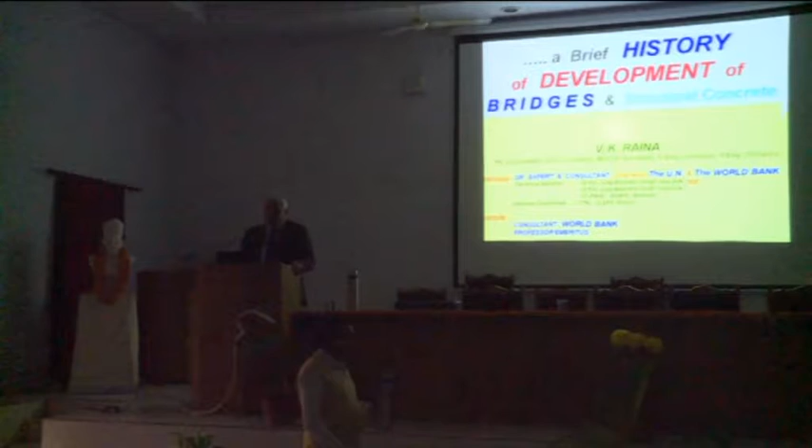I was born in November 1940, not January, and I'm no more with ILFS. That was long back, and perhaps he has been able to see my old CV. That's fine, but I'm so grateful for all the kind words. I hope I'll be able to live up to the expectations of you all.

There are two major sea links. One is a 26 kilometer long one connecting Bahrain and Saudi, which is completed, right from negotiations through investigations, analysis, design, construction, supervision, maintenance and everything. The other one is a 40 kilometer long link that connects, or is proposed to connect, Bahrain with Qatar. That is still in the stage of construction.

Anyway, that apart. Today, what I'm going to talk to you about—we had mentioned we'll be talking about the recent Nepal earthquakes and the infrastructure issues there too. That we have decided will be tomorrow morning at 10 o'clock, here. So today we will talk a little about a brief history of development of bridges and structural concrete.

I will be very quick, I was told the director has to go somewhere at 5:15 or something, so just about that time I'll quickly show the last few slides which are of extreme interest, and then you can proceed.

Bridge design and construction have come a long way during the past few centuries, and much water has flowed down, particularly in the past 100 years or so, during which more bridges have been built than in all the previous centuries.

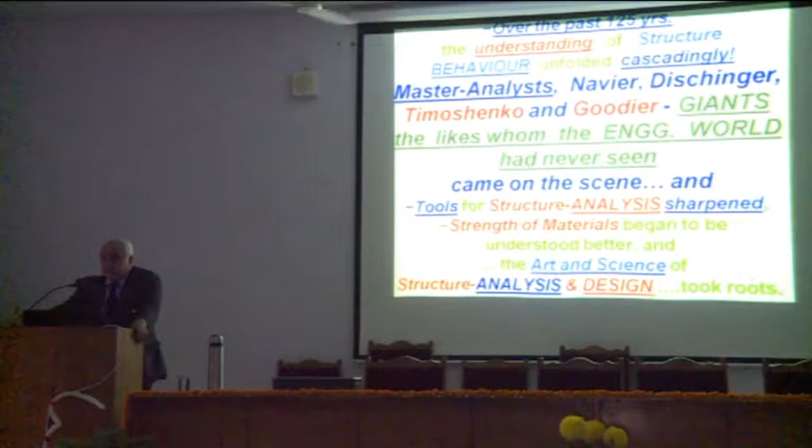Over the past 125 years or so, the understanding of structure behavior unfolded cascadingly. Master analysts like Navier, Dischinger, Timoshenko, Goodier, then subsequently Torroja, Morandi, Guillaume—these giants, the likes of whom the engineering world had never seen—came on the scene. The tools for structure analysis sharpened, strength of materials began to be understood better, and the art and science of structure analysis and design took roots.

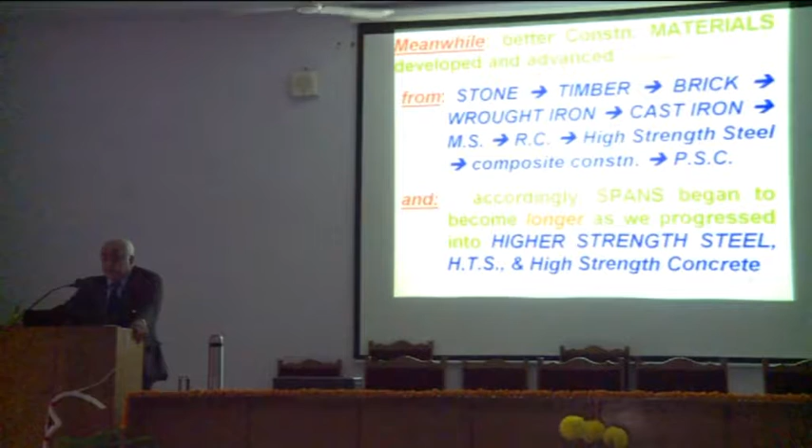Meanwhile, better construction materials developed and advanced, from stone to timber to brick to wrought iron to cast iron to mild steel to reinforced concrete to high-strength steel to composite construction and to pre-stressed concrete. Accordingly, spans began to become longer as we progressed into higher strength steel, high tensile steel, and high strength concrete.

We're talking of history, so we have to see the turning points. The flexural strength of a section was proportional to the square of its depth, but only linearly to its width—this was perhaps one of the greatest revelations ever in understanding structural efficiency.

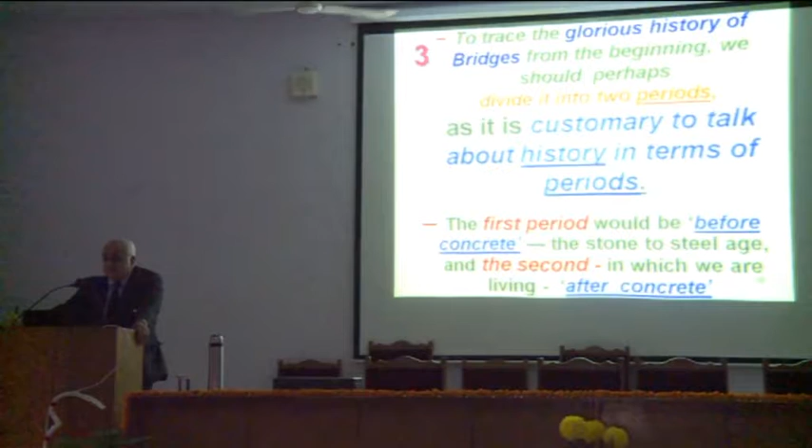Width versus depth. To trace the glorious history of bridges from the beginning, we should perhaps divide it into two periods, as it is customary to talk about history in terms of periods. The first period would be before concrete, the stone to steel age, and the second, the one in which we are living, is the one after concrete was born.

Stone and timber were the traditional building materials since the start of civilization. Stone arches, used mostly in early bridges, date back to the days of Babylon. Romans learned the art of building arches from the Etruscans. These arches were semicircular.

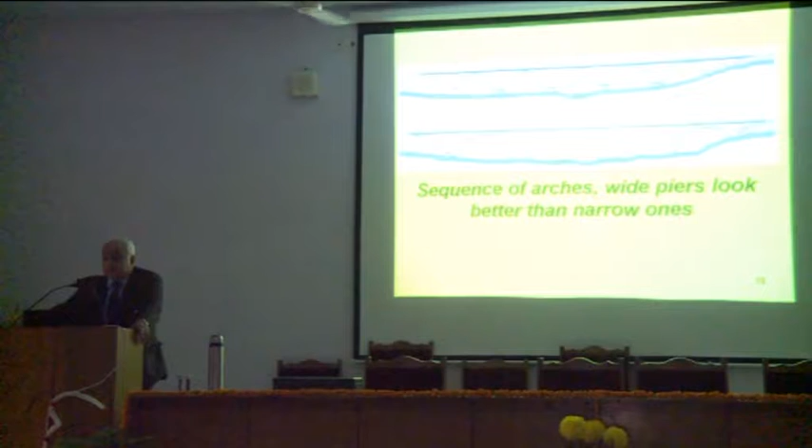It has changed very little since, because of the line of thrust. This is a sequence of arches as they were then, and even now we copy them. Sequence of arches, wide piers do look definitely better than the narrow ones. This is a sequence of flat two-hinged arches.

Back in 1502, this is important, the great man, the Sultan Bayezid of Turkey, he was a visionary. He wanted to cross the 240-meter gap between Istanbul and Pera across the waters, and he wanted a single-span structure.

He could think of nobody better than Leonardo da Vinci, the great master. His services were requisitioned. He came, he saw, he investigated, he drew his sketches, took his money and went back home. It was agreed that this would be built.

But this visionary Sultan gave up the idea because he didn't find the technology of the day able to construct something of 240-meter single span with the construction methods and materials available then. So the whole project was given up. The sketches got lost. This is 1500 something.

It's only about 452 years later, in 1950 something, that an art critic by the name of Sands attended the exhibition of Leonardo da Vinci's sketches and drawings.

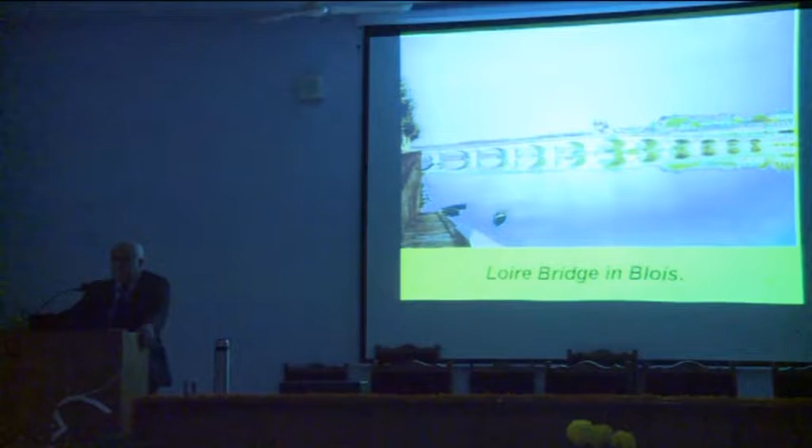Then you have this famous Loire Bridge in Blois, France again. Very simple, but see the beauty of it without interfering with the background.

Then we have this famous Professor Maillart bridge across the Salgina Gorge in Switzerland, 1930, reinforced concrete, hinged arch, three-hinged arch.

This is something we have to see, and you just fall on your knees when you look at it. It is absolutely music frozen in space. It fits so very nicely into the background, and you can imagine when it is all snows how beautiful it must look.

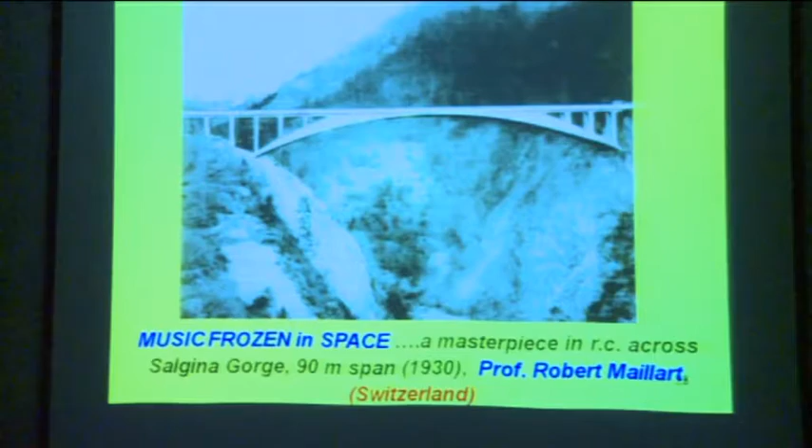Compare that with the monstrosities we have in Delhi. You will close your eyes when you come to Delhi and see them. There was once a study conducted by the World Bank on the effect on the human psyche of the hundreds of flyovers, concrete monsters being built in urban areas. The result was that looking at things like what you see in Delhi will almost certainly reduce the lifespan of those who look at it every day, compared to structures like these which will increase your lifespan. It's as simple as that.

Right now I am working on a project on climate change effects on bridges. We designed the Saudi-Bahrain causeway for a 30 centimeter rise in sea level. We did everything, it's built, but it is wrong—today the estimate is upwards of 1 meter. But this is all conjecture, nobody can really analyze that. Be that as it may.

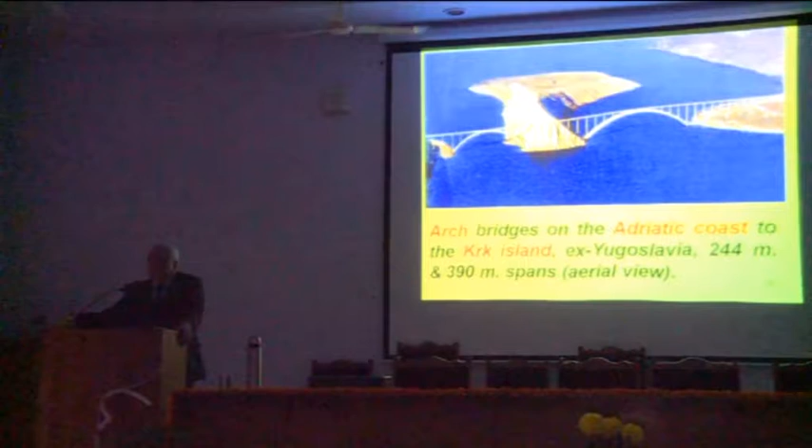This was a competition, in the island of Krk in what was ex-Yugoslavia, which has since broken into three countries. I was there for almost a year.

This was a competition. They wanted to build these connections between one side and the other. I don't know if it works. Yes. Oh, I don't, yeah. Yes. So, I can't work with this.

Connecting this side to that side—this was a global competition. The idea was not to hurt the environment, but to make it fit beautifully into the background. This competition photograph, taken by air, shows how beautifully it fits in, merging with the background of the rocks.

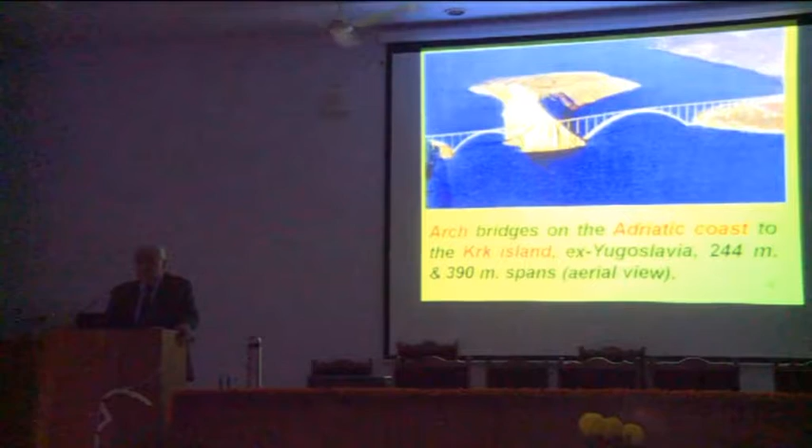It's not just about calculations and analysis—you have to do a lot on environment and aesthetics, because these are things that will be left for centuries. Well, one hopes for at least a century, if not longer.

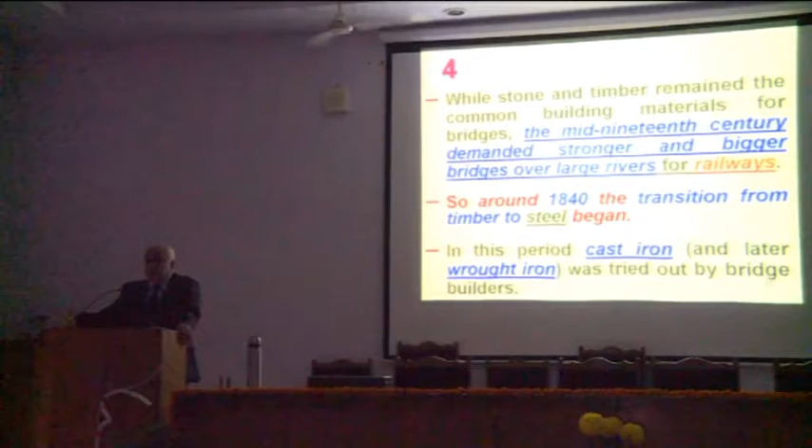While stone and timber remained the common building materials for bridges, the mid-19th century demanded stronger and bigger bridges over large rivers for railways. So around 1840, the transition from timber to steel began. In this period, cast iron and later wrought iron were tried out by bridge builders. Cast iron, being reasonably good in compression but no good in tension, could not allow longer spans. Later, when wrought iron came into existence, the two were combined so that wrought iron could provide tensile members, allowing longer spans. This was another big step in the history of bridge development.

The first recorded use of iron in bridges was a chain bridge built in 1734 by the Saxon army across the Oder River in Prussia. However, cast iron was not suitable for large span bridges due to its low tensile strength. A combination of cast iron for compression members and wrought iron for tension members was used for truss bridges in 1840.

In 1856, just about one year before the War of Independence in this country, Bessemer patented a process for making large quantities of steel.

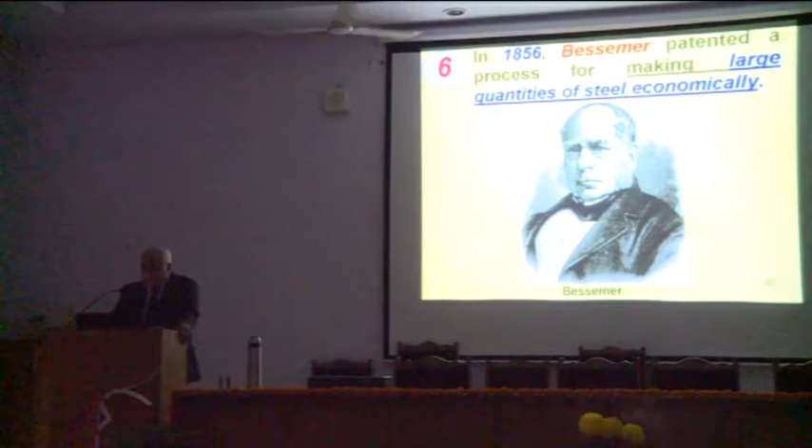This gave the fillip to the construction of bridges for long spans, followed by Siemens and Martin, who introduced the open hearth process. In the last part of the 19th century, the new material, steel, caught the imagination of bridge builders.

The Firth of Forth—'Firth' meaning a finger of sea going inland in Scottish, and Forth being the name of the place—was where a bridge was built: a cantilever bridge of 520 meter span. Then there was the Brooklyn Bridge, Roebling's suspension bridge of 490 meters in New York. These were a few of the famous achievements in the 19th century marking the beginning of the modern era of bridges in steel.

This is the Firth of Forth Bridge. When you see it broadside on, it speaks to you. You can see the flow of stresses. You can see it is simply telling you how it is built. It's a cantilever construction, simply supported, believe it or not.

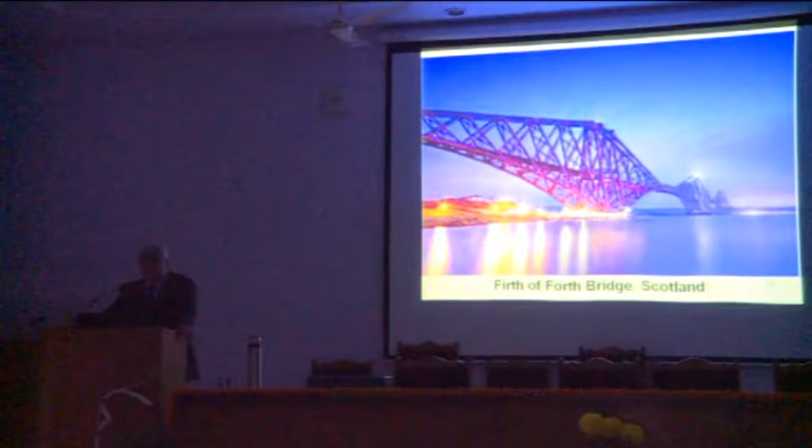I would like to spend a little more time, but I don't have time. The director has to leave.

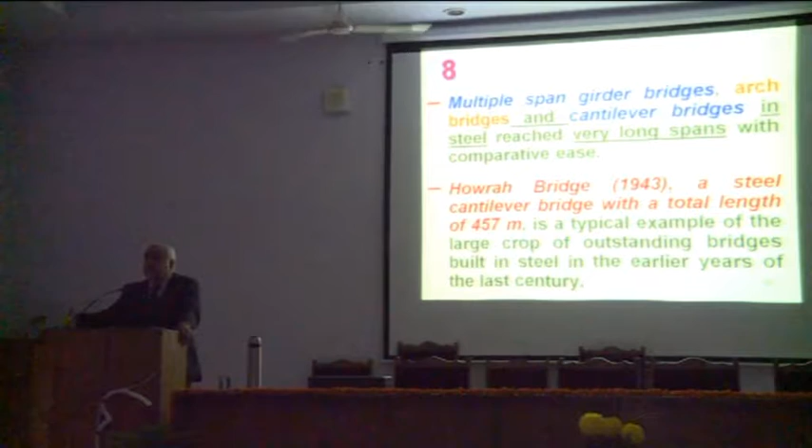Howrah Bridge, our own, 1943, designed by Rendel Palmer and Tritton of England, a steel cantilever bridge with a total length of 457 meters, is a typical example of the large crop of outstanding bridges built in steel in the earlier years of the last century, but it is a bewildering mass. It is optimal quantity-wise; some people like its shape, some don't. It is an absolute bewildering mass because it carries rail traffic, road traffic, millions of people. You have to see it to believe it. Many of you must have seen it.

A very substantial advance in the understanding of the theoretical analysis of the load response of the structural system of suspension bridges was made by the 1920s. Many elegant bridges were built, like Lindenthal's Manhattan Bridge of 1909 with a 450-meter span, followed by Steinman's 340-meter span Florianopolis Bridge in South America, and the Delaware River Bridge of 530-meter span in 1926, to name only a few.

By the way, Steinman's bridge of 340 meters - he was given the commission to do the analysis, design, detailing, and then supervise the construction. But as a student at New York, this was the very bridge that was his project, which he submitted and got his degree for. Then later, in practice, he was given the same bridge to actually build, which he did, and I will show you that.

The big leap forward came in 1931 with the construction of the George Washington Bridge in New York City, which has been acclaimed by no less than the great Stüssi, one of the very great engineers. He said of this bridge - and this is translated from French - it was the most important step in the evolution of art and culture of bridge engineering. This is an exact translation, therefore it suffers a little bit, but I didn't want to touch it.

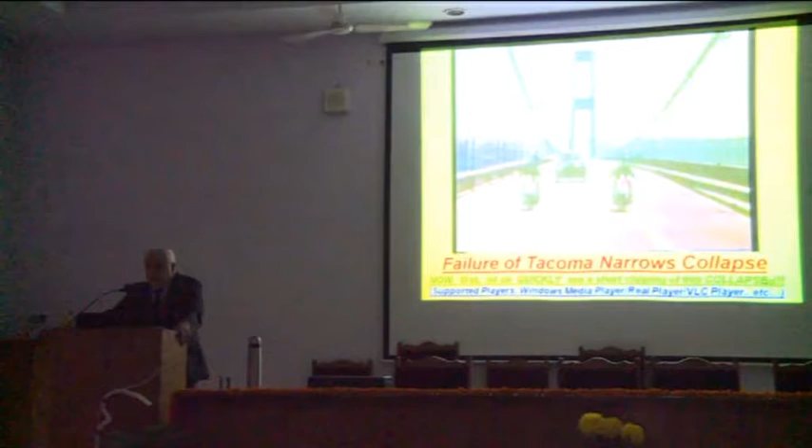You might have seen it, but I'd like to show you, if I can, at the end, the video clip of the actual failure of the entire long bridge. This is only a part of that—the end part of it. I'll copy it and show you later. This is the one which I will show you.

Professor Fritz Leonhardt, the great man, worked under Hitler and built a lot of bridges for him, but he claimed all along that he had nothing to do with the Third Reich. He was a great analyst, a greater designer, the greatest detailer—the one who proved that detailing in the drawing is much more important than all the analysis in the world.

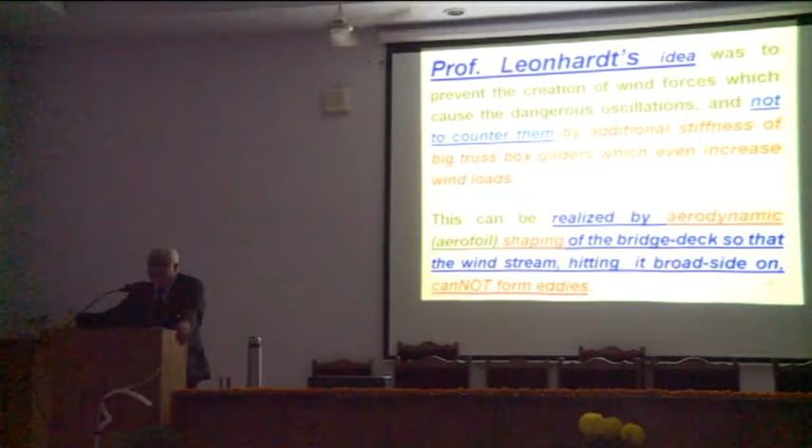His idea was to prevent the creation of wind forces that cause dangerous oscillations, rather than counter them with additional stiffness from big stiffening trusses, which actually increase wind loads at their nodal points. This can be achieved through aerodynamic, aerofoil shaping of the bridge deck cross-section, so that wind hitting it broadside cannot form eddies. This is the great man—he has since died.

Simultaneously, the reaction forces caused by the wind, the static wind loads, can be reduced considerably. The dangerous torsional elements of oscillation can further be prevented by suspending the deck from a single cable—monocable suspension bridges. That was his idea.

In fact, a consortium of European contractors took the design approach of Leonhardt and Krupp and used it for the bridge across the River Tagus in Lisbon, Portugal. I'll show you—I keep jumping across.

The first design of this completely new type of suspension bridge deck—monocable with inclined suspenders, so the truss reactions would also help stabilize it—was made in 1960 for the Tagus Bridge in Lisbon, and tendered for by a consortium of European construction firms.

But the 1,104-meter suspension span bridge was, however, built the usual way using stiffening trusses. The reason was that the government officers all had the same old mindset. As I said this morning, don't ever join government service if you want to be an engineer. Don't ever.

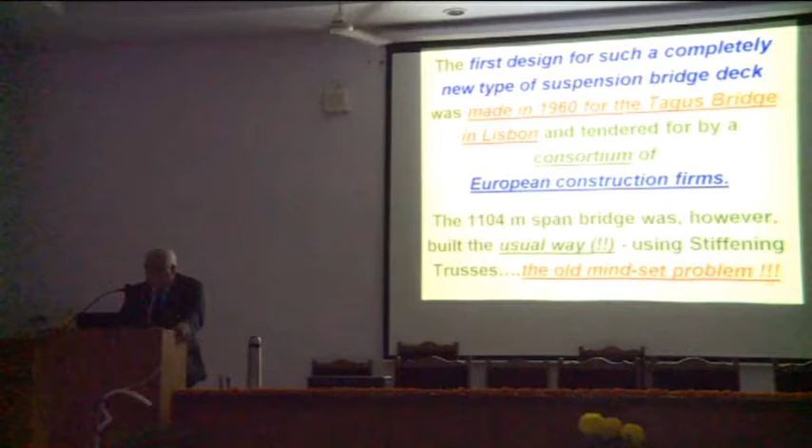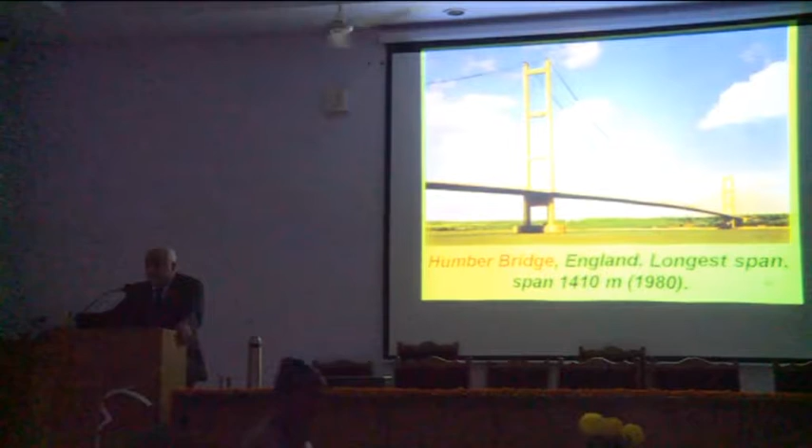Humber, England, 1410. No stiffening trusses, but you can see the cables. If you can see - can you see them? Not very much, not in this slide. This was again a step in bridge building.

As I said, we're talking of history. We're not talking today either of analysis or of design or of detailing or of drawings or of quantities or of costs or of contracts. We're talking of the history, which is this.

Introspection, and this is important. One wouldn't learn unless one investigated and admitted the failures.

There's something which you might know - a feeling, a random empirical feeling that every three decades, every 30 years, there's a major bridge disaster in the world. There were three of them, four of them, that occurred within a span of 5-6 years: the famous King's Bridge collapse, then the Koblenz Bridge in Germany, then Yarra Bridge in Australia, then Milford Haven in Wales.

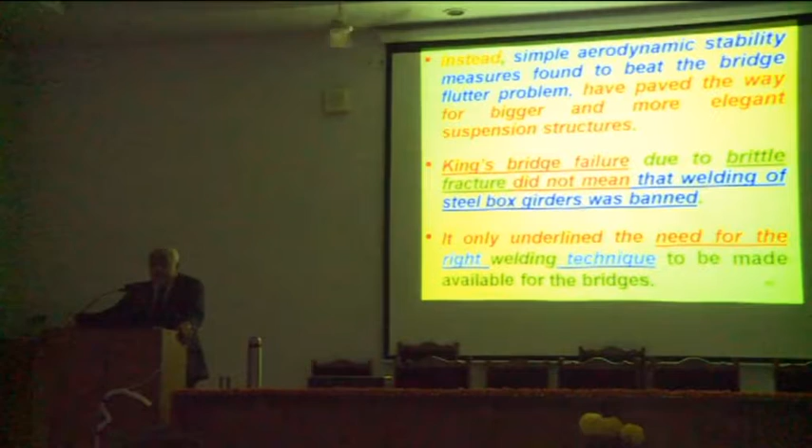In very cold atmosphere, steel can crack off because of brittleness. King's Bridge failure due to brittle fracture did not mean that the welding of steel box girders was banned. It only underlined the need for the right welding techniques to be made available for bridges of this sort.

And likewise, the series of box girder failures of the 1970s could not lead to the conclusion that there was anything fundamentally wrong with thin plate structures. You see, concrete bridge decks, which are boxes, do not suffer so much from warping and distortion, but the steel boxes do, because they are thin-walled structures.

To understand distortion and warping, you have to understand, you have to analyze, you have to use the second-order theory, you have to go back to the basics, you have to go back to the differential equations. If you don't do that, you don't learn from it.

The second order, i.e. the buckling analysis of instability of thin plates due to geometric imperfections, only earned the design attention that was previously lacking. So it became part of the design code. Few, if any, of the failures became inevitable merely through the inexactitude of available methods of computing stresses.

You can compute stresses, you cannot measure stresses. It would be an illusion to suppose that greater perfection in such methods and a bigger pile of computer printouts, which I'm afraid today's designers do, of itself will reduce the risk of accident. Just because you have a big pile of computer printout doesn't mean a thing.

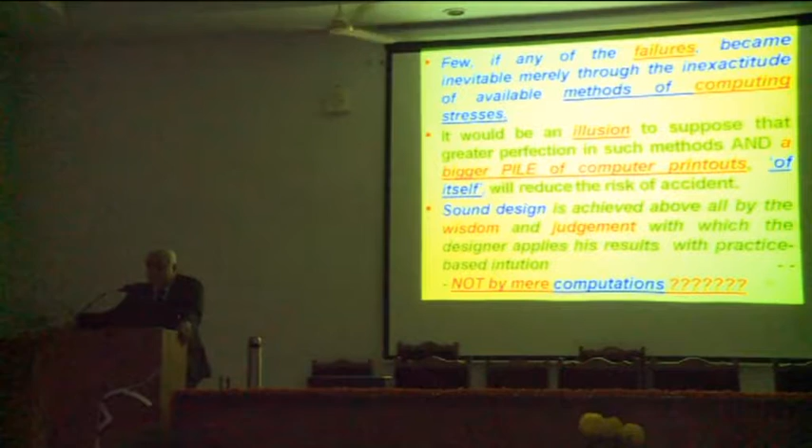Sound design is achieved above all by the wisdom and judgment with which the designer applies his results, with practice-based intuition, not by mere computation. Great courage and judgment are demanded of the inquirer, as he has a task which requires freedom from bias, while at the same time demanding a definite opinion. Originality comes out of understanding, and understanding comes out of relentless practice, not from mere talking. Good judgment comes out of experience, and experience often comes out of bad judgment.

The great Navier, in 1820, opted for the classical suspension system, and he condemned the cable stayed solution, which is today's rage. But that was the level of understanding of the great mind then. He was a great, great analyst. It remained that way until 118 years later, in 1938, the master analyst Dischinger developed a suspension system which was actually a combination of cable stayed and classical suspension bridge systems. Then started the beginning of cable stayed structures, because somebody like Dischinger came forward and showed us how.

Now you can have, basically, if I can touch it again, I'm afraid of your pointer. Initially, no, it won't work, is it? These pointers are all disappointing. Can it? No. Anyway, you can see initially, I want time, I can't do this in 50 minutes, 1 hour, 2 hours, 4 hours minimum, because then you will get the taste, the flavor of what I have to talk to you. It's a lifetime thing that I'm talking to you.

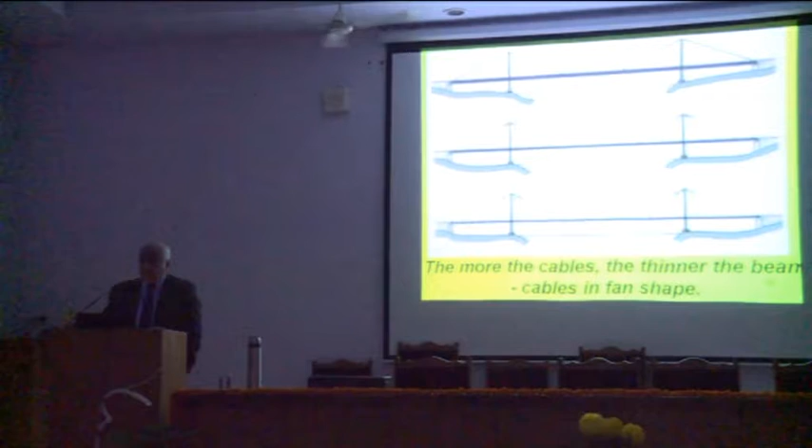It is thought that cable stayed bridges began to be built only recently, just 25 years ago, which is nonsense. The first one was done by Riccardo Morandi. I worked under him for 2 years. Difficult to get money from, but if you sat in his presence, he would radiate understanding into your thick head. He was so great, Italian.

He is the first one, in the 1950s, he built the one at top. I'll show you his actual bridge, but he was essentially a single cable and thick beam system. Later, people understood they had multi-cables, and obviously the pickup points are so many more, the thickness of the beam system becomes lesser. Then came the multiple. Some is fan-shaped cable system, some will be, I'll show you those. This is how the development took place, but he was the first one.

In fact, some people dispute that, because Denmark or Sweden also built a similar bridge around that time.

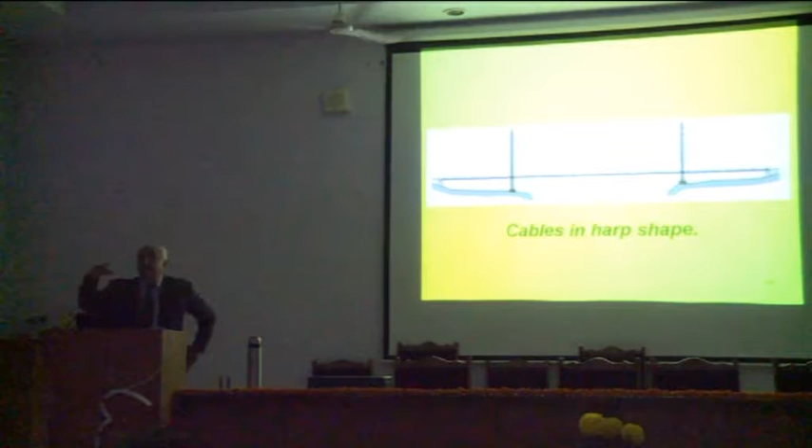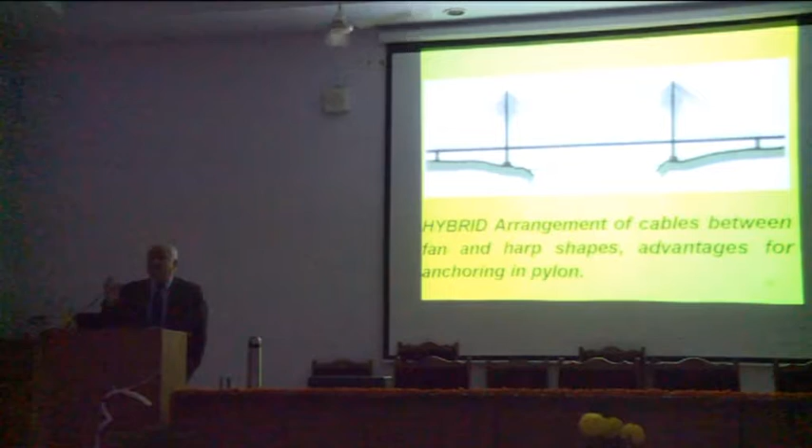This is a cable in harp shape. Some people like it, some don't, but it's much easier to change, if you have to replace some of the stays, this is the easier one, not the one which is fan type, because they are so congested at the very top. This is the fan type. Now this is the hybrid, which is part cable, part fan and part harp, both. So you can replace the stays as well as still try to retain a little more beauty of the fan system.

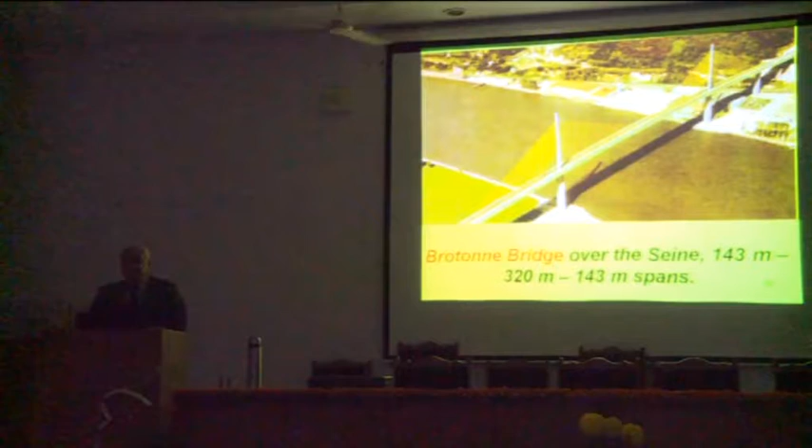One of the best ones is a very complicated bridge, this one, Brotonne, over the Seine, near Paris. 143 meters, 320 meters, I mean the central span is over 1,000 feet. But it looks a beauty. You look at it, you just fall on your knees in silent salutation to somebody's understanding. That is this bridge.

The great Professor Leonhardt hypothesized way back, he's no more, he's dead, in his 1972 IABSE paper that for spans of 750 meters to 1500 meters, the cable-stayed system was technically and economically superior to the classical suspension system. And if Fritz Leonhardt makes that statement, you just don't question.

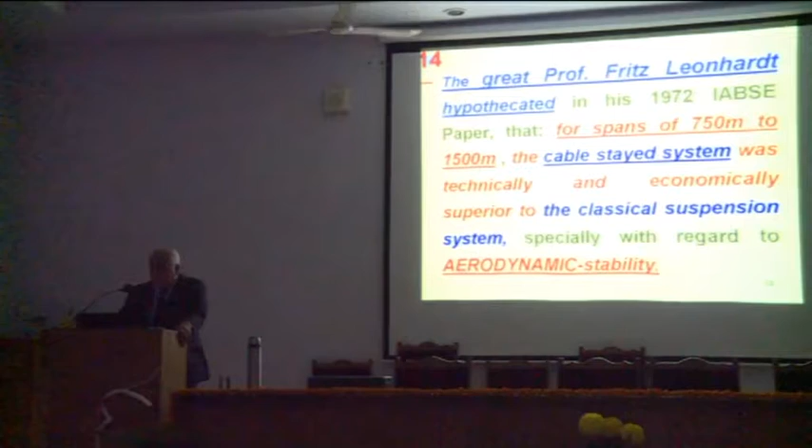Especially with regard to aerodynamic stability, but not for railway bridges because of the impact, because of the vibration. This is that Professor Leonhardt.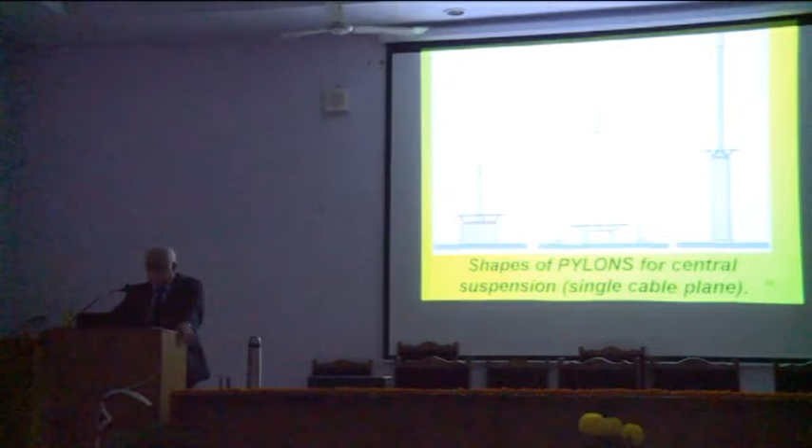High cable stresses to ensure favorable stiffness ratios on flat aerodynamically shaped aerofoil deck sections with sharp wind noses are now the order of the day.

The great Stüssi again remarked in his IABSE Symposium on Concepts of Safety of Structures, London 1969, that the scientific period of design was introduced by Louis Navier way back in 1785-1836. The same old man, Navier, great man, who provided the transition to scientifically based construction with his principal work titled Résumé des Leçons, 1826, and thereby fundamentally created the applied science of statics.

This is too good. I wish more people had come. You won't read this in the books. I'm really not very happy. I wanted to see many more people.

And I shouldn't be saying it because this is a place where I belong. Elsewhere, I charge one lakh for a two-hour lecture, believe it or not. That might put some sense into those who haven't come.

The great Navier gave these lessons. He was a great teacher too. The great Navier gave these lessons on the application of mechanics in the establishment of construction and machines. This is an exact English translation of his French.

So I don't want to touch that, I just translated it as is. The great Navier gave these lessons on the application of mechanics in the establishment of construction and of machines. He gave this at the Royal School of Bridges and Roads, l'École Royale, whatever.

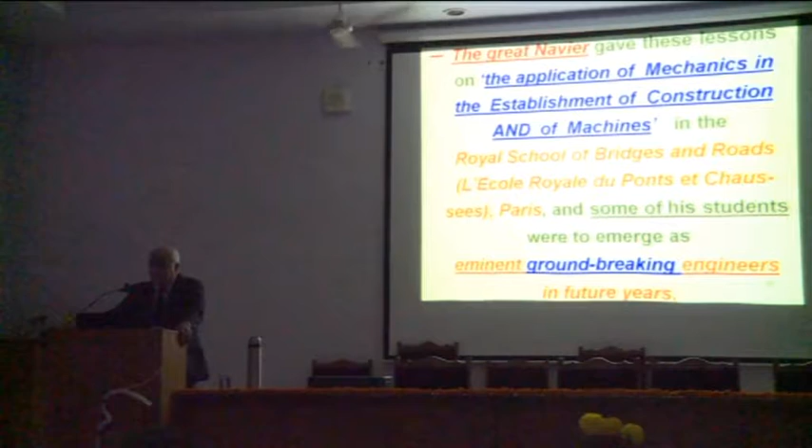Some of his students were to emerge as eminent groundbreaking engineers in future years. After Navier, the development of engineering design was fostered by very many pioneers like those groundbreaking great men, Karl Culmann, Otto Mohr, Friedrich Engesser, to name just a few.

And the glorious history of Roman concrete. We graduated from steel, we're now coming towards concrete. This was used to build such famous structures as the Pantheon, which is more well known.

Animal blood was used for some time in their earlier days for mixing concrete. Some details of history of civil engineering are bizarre, if not gruesome. But the art almost went into oblivion until the grand revival in recent times marked by the entry of Portland cement into the scene.

With the progress of Portland cement concrete, it came to be used in bridges as a substitute for stone initially. Concrete was first used for a bridge of 13.5 meter span across a canal in France in 1840.

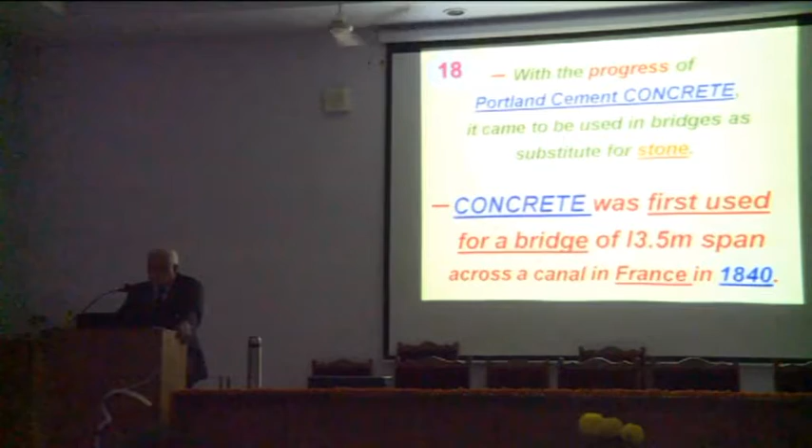You're welcome, but—ladies, I am addressing you—you're welcome, but I don't like coming late. If you can't, then don't come. This is not a picnic.

Coignet, another great man, another Frenchman, took out a patent at about the same time on the structural use of reinforced concrete. Now you will see how many people were interacting for the development of structural concrete.

In 1855, Wilkinson, a Britisher, secured in England a patent for a concrete arch floor reinforced with tie bars. This is his exact words, which was discussed by no less than Fairbairn in his celebrated book in 1864.

Then came Monier. Monier's first patent was taken three years later. It's all in the race for structural concrete. That's why I said a brief history of development of bridges and structural concrete. Now just see—Wilkinson, then Fairbairn, then Monier, and first Coignet.

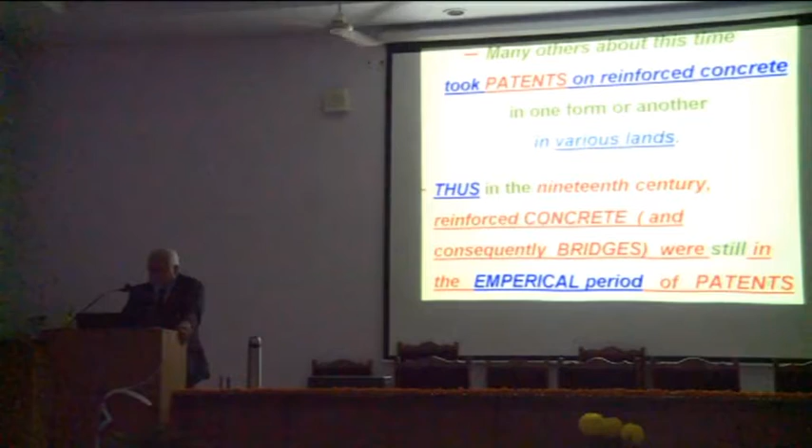The search for a basis of rational concrete structure design, not structural design, try and understand that, began in the last part of the 19th century itself.

Thaddeus Hyatt is credited to be the first to establish a basis of analysis of stress in reinforced concrete. He made absolutely visionary statements that you take for granted today. He stated the principle of bond, that the reinforcement must be able to resist sufficient tensile stresses to balance the compressive stresses in concrete, which you don't even think about now. But this was one of the fundamental, groundbreaking statements of a visionary then. And then see what happened after that.

Hyatt was an American lawyer, not an engineer. By education he was a lawyer, but an inventor by nature, and was later to take patents on deformed bars, what we call tor steel in this country, which is FE 500 now. He published his 28-page book on the use of Portland cement concrete combined with iron in 1877, which may have antedated the design principles to emerge by a good two decades.

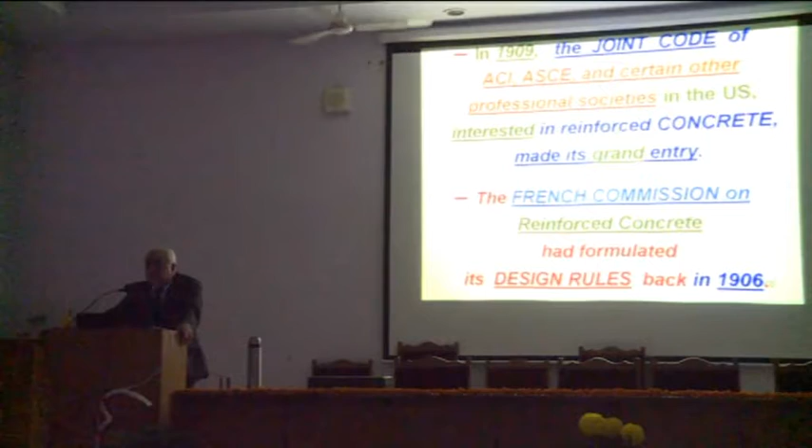In 1909, the Joint Code of the American Concrete Institute, American Society of Civil Engineers, and certain other professional bodies in the U.S. interested in reinforced concrete made its grand entry. The French Commission on Reinforced Concrete had formulated its design rules way back in 1906.

That use only the smallest quantity of mixing water that will produce a plastic, workable concrete. No effect, no problems now, no sweat, but it was not known then. That's a big step in the history of development of structural concrete.

And yet another historic pronouncement back then: with careful control of water and proportioning, attention was focused on workability, placement and compaction.

Then came the wonderful Monsieur Freyssinet, the Frenchman. We'll talk about him in a few minutes. He proposed compacting concrete by vibration, way back in 1917, yet another historic development. You know these vibrators used for compacting concrete - think about how many vibration impulses per second. And that he said in 1917.

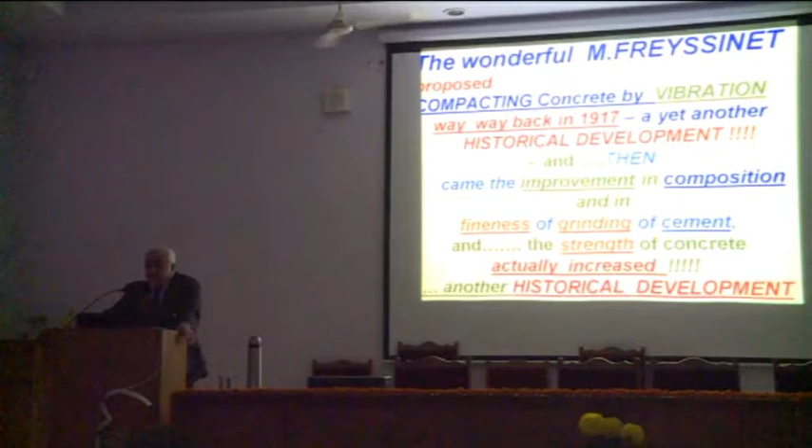Then came the improvement of composition and fineness of grinding of cement. Finer the cement, the better the grinding. The smaller the particle size, the higher the heat of hydration, the better the strength. But controls had to be tight. This actually increased the strength, and this was a historic development in the business of structural concrete for high-strength structures.

In Europe, they used mild steel like we used; Americans preferred deformed, tor steel. The designers had chained themselves universally to a low permissible stress of 1250 kilograms per centimeter square, and the bogey of cracking and corrosion made higher strength reinforcement almost a taboo. They wouldn't let you.

And you can see, I can't use it. This is a bogus thing. It doesn't work. I knew this wouldn't.

Then we had the other example, this is in Manchester, Mancunian Way flyover. Not precast, cast in situ, but here it is. Here it is. Then this is Al-Khaleej Viaduct in Riyadh, Saudi Arabia.

You have to see the bridges in Saudi, you will understand how good those bridges are. Not by Saudis, these have been done by outsiders. But this is 2 kilometers long, snaking like this, called Caterpillar Bridge. Now, there was no need for cantilever construction, the method by which this was built.

You can see why the soffit of the bridge, soffit of the superstructure, is only 5.5 meters above the ground. Nobody, you have to be foolish to do this. But one of the sheikhs had gone to Europe, he saw a construction that looked like that, and he insisted, he said, I want a construction like this.

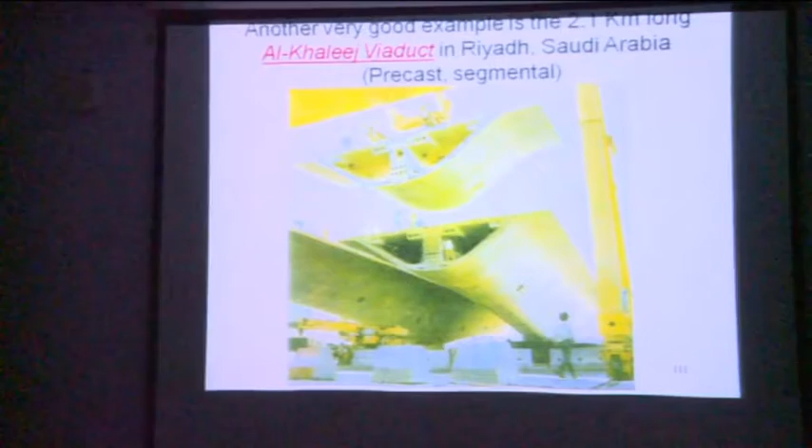We said, yes, why not? It was a laboratory exercise, we were paid very heavily, we did something we would never do, and that was this. And this bridge, how it looks at night, there is no pier. The superstructure literally sits directly on the bearings and the footings, because there was no need for it. There is no height, but we had to do it.

But the beauty and the difficult thing about this is the cross-section of the superstructure, it's two parallel boxes going snaking around, is a hyperbolic paraboloid, longitudinally as well as transversely. No 5 square meters of shuttering could repeat from one place to the other. You can imagine how costly this stupid exercise was. But he wanted it, so he got it. We got our money, he got his bridge.

Flyovers have also been built totally using precast elements. A very quick one. Here's an abutment which is built out of precast elements. They are numbered 1, 2, 3, 4, 5, 6, 7. They're all organized here. If we had more time, because he has to go.

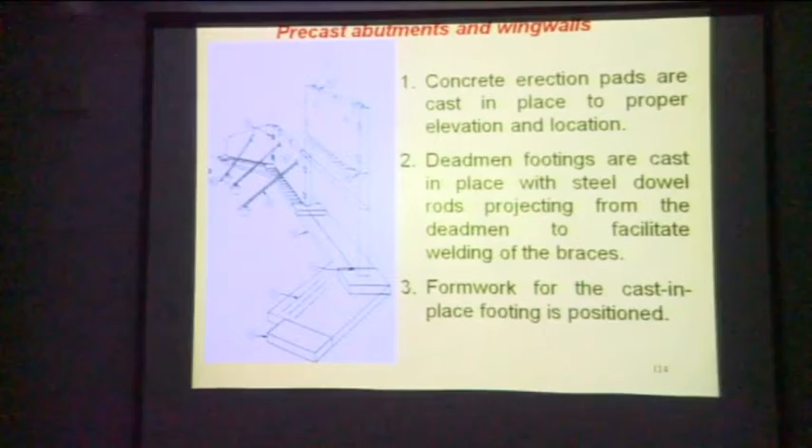These are the steps, and each individual precast piece, how it is built up like a Meccano set. Precast abutments and wing walls.

Then you can do a bridge like this, everything is precast, you can see that. The pre-stressed concrete sheet pile, abutments and wing walls, pre-stressed concrete piling pier, reinforced concrete abutments and wing walls, everything is that, precast, fully, you can see you can feel it, see it straight away.

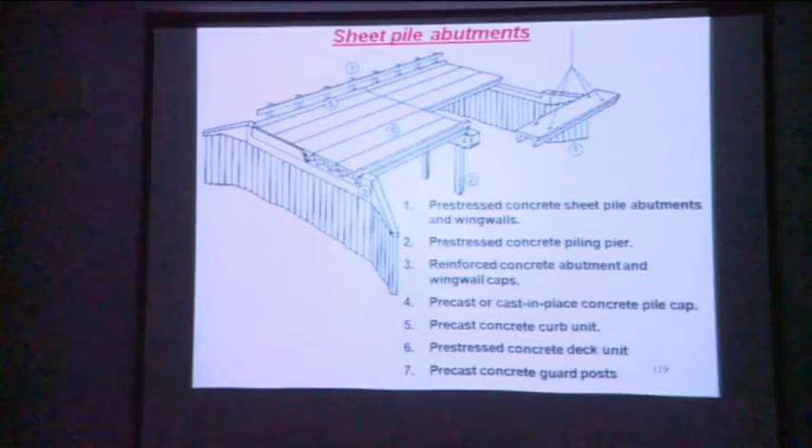The big break in the art of reinforcing the concrete came with the introduction of pre-stressing. The idea of pre-stressing, conceived and put to practice in the 20th century, is the single biggest happening of the greatest significance in the entire history of construction on this planet.

The man who first gave the form and content of this concept, the originator of the pre-stressed concrete idea, was none other than the greatest of greats, the master designer, builder, genius of all time, Monsieur Eugène Freyssinet, a Frenchman, the greatest civil engineering visionary of all time. Here is the man.

A lesser man would have been contented with the fame and fortune he had in the 1930s, because he was an inventor par excellence. He had money from all the patents in the world. But Freyssinet was a man with a mission in his heart. His life carries an obvious message. His bitter struggles for 7 long years for the cause of pre-stressed concrete made history. If history has to have its heroes, here was one for the history of bridges.

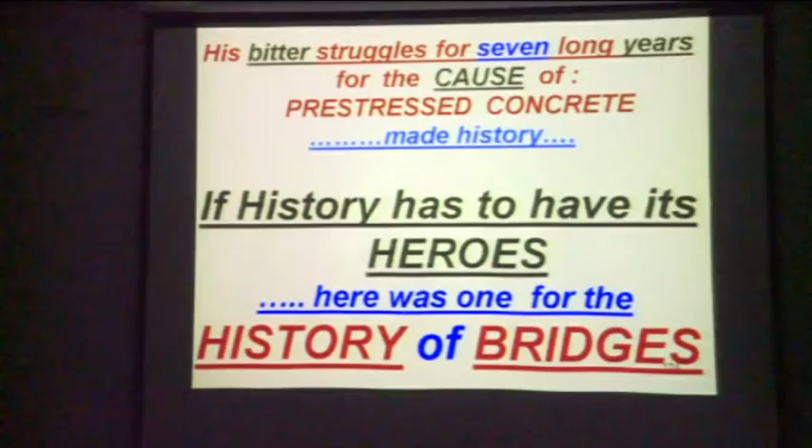Freyssinet took patents in 1928. He was out to sell history's most exciting building material, called pre-stressed concrete, but alas, with no buyers around. The same problem of mindset. He had reportedly told his friend, Le Corbusier, both being French, he says, in translation, 'I reached my goal, now I am looking around to see what I can use this discovery for, and who will accept it. How do I convince them?'

These are his desperate words. And he continues, he says, 'In my opinion, modern society needs it for all their housing and their highways.' Way back then, in the 1930s.

Corbusier was so touched by the sentiments of his friend as to conclude, in that one short sentence that Freyssinet wrote to him, he says, 'He has crammed a vast wealth of poetry, lyricism, solidarity and concern for mankind and for the hearts of human beings.'

Can we stop this fellow? It's a little... which switch is this? I don't want to touch them all. I don't know which one, I'm sorry. I would have done it, but I don't want to switch off the computer. Oh good, you have one.

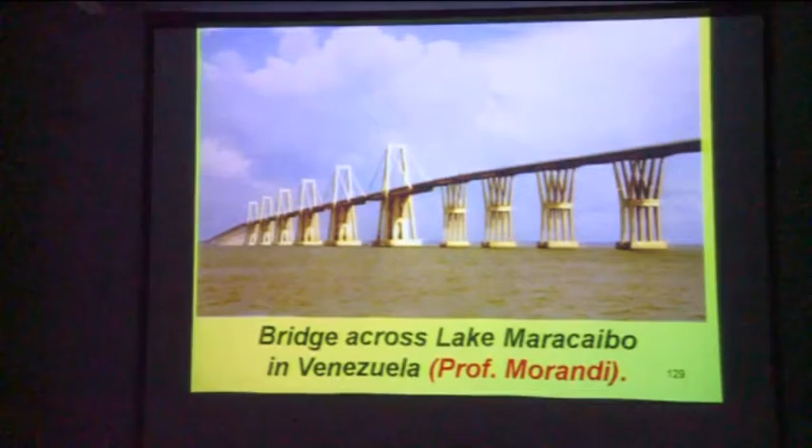This is his famous one-unit, one-element Maracaibo view of the main span. You could see how the stresses would flow. The live load would be picked up by the beams, picked up by the stays, onto the pylon, down into the foundation. Not simply supported, but statically determined. This is his famous Morandi table.

Same bridge, but very difficult for maintenance people. They have to look for cracks and distresses at a million angles and cross sections.

But that was not all - he did all the bridges across, in the west of Italy along the coast. That's called the Autostrada del Sole, the Sun Highway. There are first-class bridges in that. Each bridge is different than the other, and each bridge is more complicated than the other. Because it is coming from Morandi, nobody could question him. But these are bridges you can study for a lifetime.

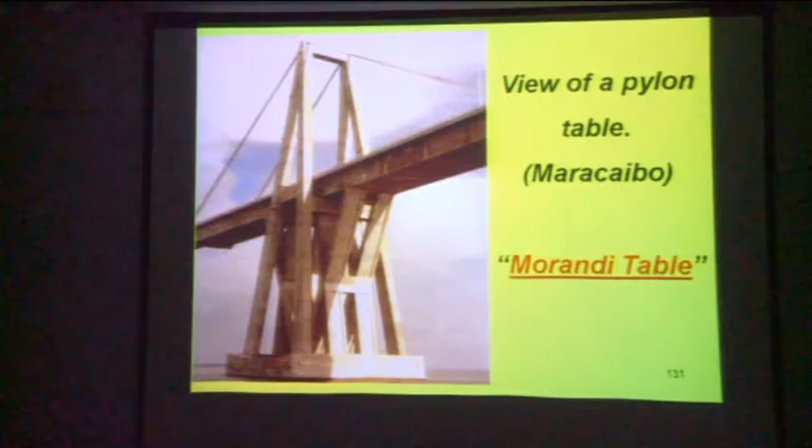You should go abroad. This morning we had a 1.5 hour session. I don't know how many of you came, but that's where I was explaining quite a few things.

Remember this: it's not the analysis that you start with. You give me a problem, and you straight away open your laptop and start - don't do that, that's not the way practice is done. You have to conceive the idea. You have to draw sketches to scale. Then you transfer those sketches to the drawing board, chisel them and cut them short here and there till it looks like something and you can see the stresses flow. Then you start the analysis, then comes the design. And in doing so you have to fix the cross-sectional dimensions first. That doesn't come by you starting your laptop.

You have to actually physically see the big notebooks that they have. I have seen one in Madrid, there's a big bookshop - that's where Leonardo da Vinci's sketches are, the big book containing the sketches, that book is about 1.5 meters by 2 meters, nobody can lift it. And these are original sketches. You see them, you will drop dead.

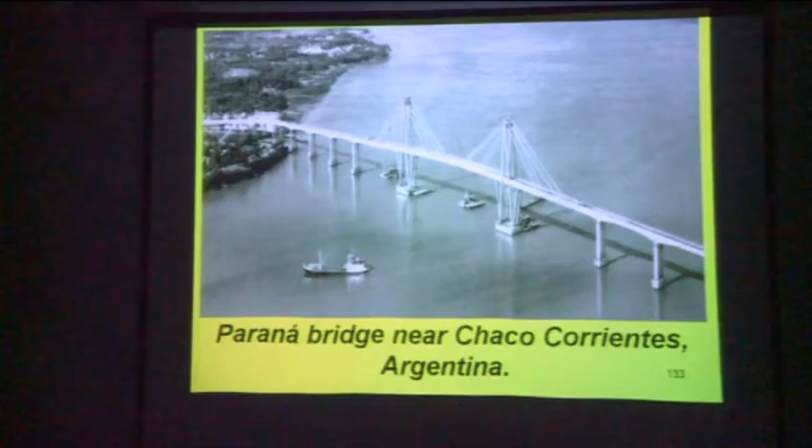In the 70s, the longest span of beams reached 230 meters in Japan, and for cable-stayed concrete bridges, designs had been made with about 300 meter spans then. Today we go up to 500 meters and even longer. But this is 1970. The achievements in building long-span bridges in pre-stressed concrete are too close to our times, like yesterday, not good old steel bridges of wrought iron and cast iron. So it's not easy to comment on bridges built in the same decades we're living in. But the development of new landmarks in span, form, and construction technology is growing at a dizzying pace.

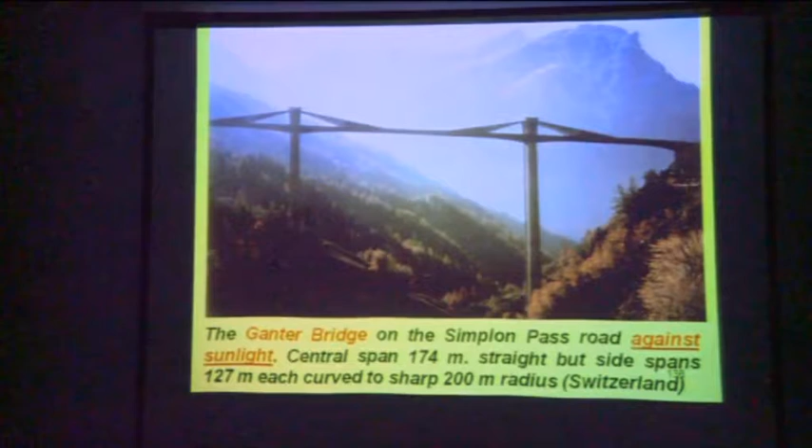Now this is again Professor Christian Menn of Switzerland. This is the Ganter Bridge, Simplon Pass in Switzerland. This picture is taken against the sun. If you see the same bridge along the sun, this is how it looks. And imagine if you see these two towers this way or that way, when it is snow all around, you freeze. You just cannot do anything other than appreciate.

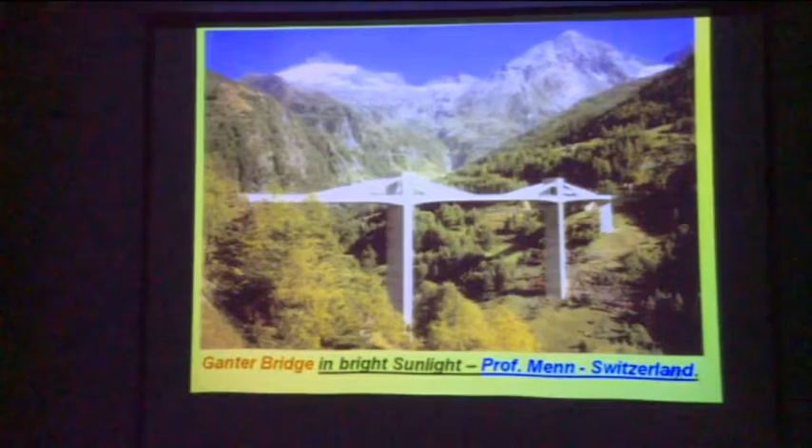Each span is over 1,000 feet, 2.5 kilometers long, and the pier height is taller than the Eiffel Tower. I'll show you that. Now you begin to see what this bridge is.

Now I'll show you a picture or two of this bridge during construction, above the cloud line.

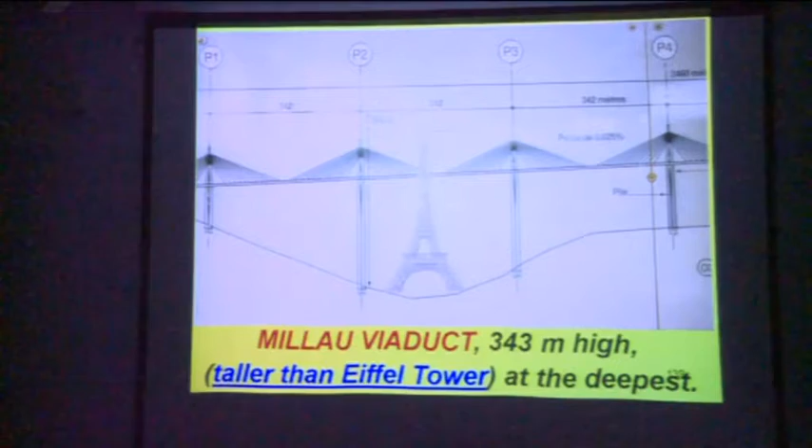Bridges is a great topic. Please take to it.

The originator of construction in the free cantilever method—because if you have to cross bodies of water where you cannot raise the staging from bottom up, you have to do something else from the top itself. That's called the free cantilever construction method. The propounder is Professor Dr. Ulrich Finsterwalder, one of the greatest bridge builders of our times.

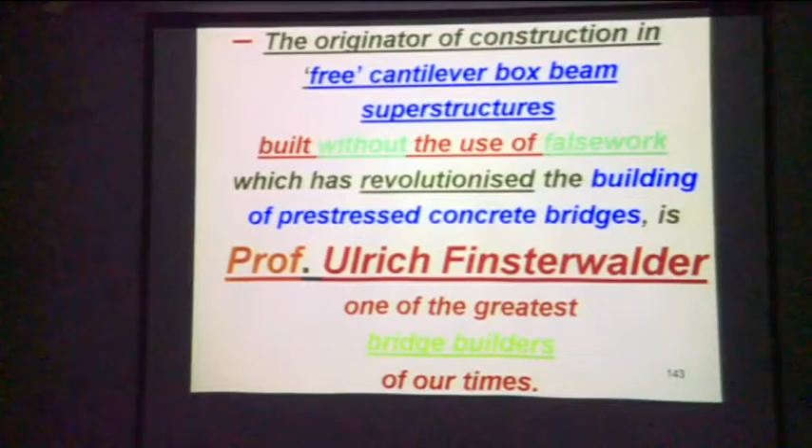Now here is the great man, with a later modification. He would do segments on both sides, pre-stress them together, again segments on both sides, pre-stress them together, and keep going outwards from the pier, doing the same from the next pier till the two cantilevers would meet. But these were all cast in situ, cast in place segments.

Somebody else came later, he did the same thing, but converted the technology into using precast segments. And that was Jean Mueller, J-E-A-N, a disciple of Freyssinet and Guyon's school of thought.

A later modification of this method, cantilever construction with precast segments, was introduced in '63 for the Choisy-le-Roi Bridge in Paris and the Oléron Bridge on the French coast—I will show you—by a contracting company. The consultant was STUP, S-T-U-P.

It's an acronym. S stands for something, T for something, U for something. STUP Paris, which was owned by Freyssinet. Freyssinet was a great legend. He would give the problem and he would give you the solution. He wouldn't tell you how. And he wouldn't perhaps even know.

But a great mathematician turned engineer turned mathematician named Yves Guyon used to be with him all the 24 hours almost. He gave mathematical proof of everything that Freyssinet propounded. And he married his daughter as well, because he was there for too long. Now, but the idea is not marrying the daughter, which you can. The idea is, these are the making of great minds.

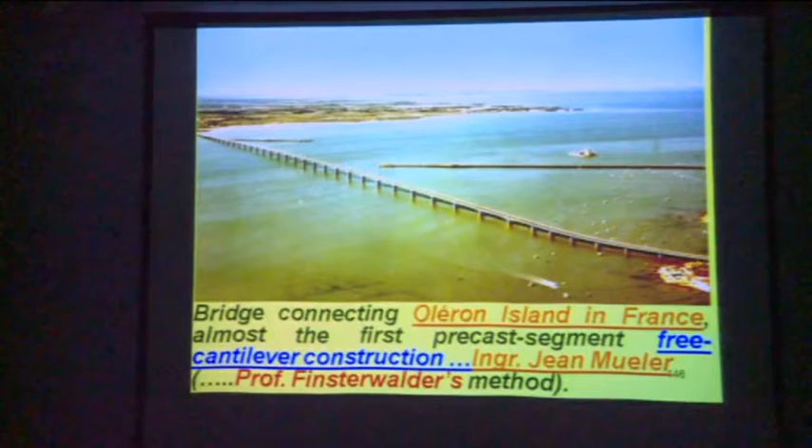Introduce those deflections in reverse, that's called the camber calculation. Even today computers have to be used in order to predict it with the correct creep coefficient. Imagine what they did in '64 when there were no such knowings. That's when you listen to them, you get to know.

No, this is the Eastern Schelde in Holland. This looks very massive, but mind you, each span is a 300-footer. It looks massive because everything is so fat and big. Everything is precast - the piles are precast, the pile cap is precast, the inverted V-piers are precast, the deck is precast. And you can see the effect of the double attack of chlorides and sulfates through the stain marks. Each span is about 300 feet, 5 kilometers long.

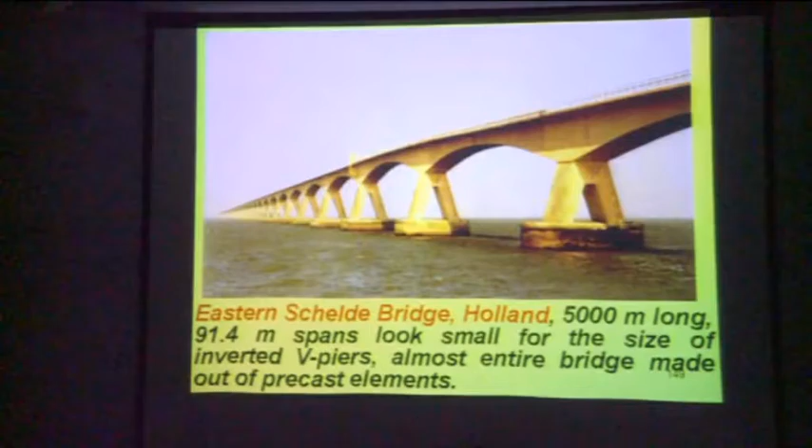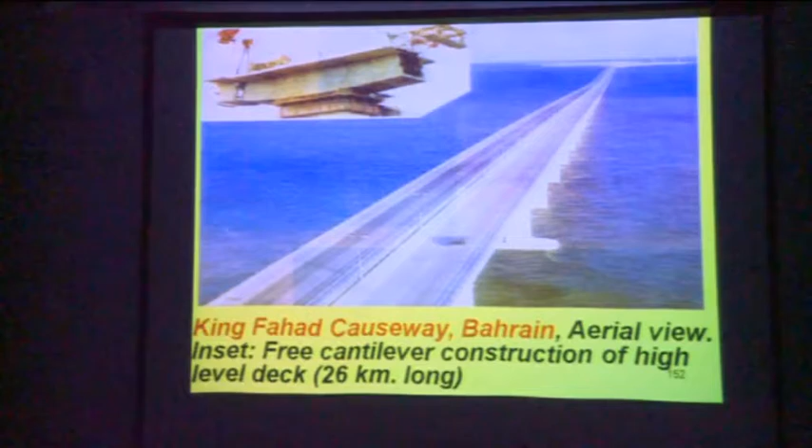This is my first really long bridge, 26-kilometer long, Bahrain-Saudi sea link. Of the 26 kilometers, about 14 to 18 kilometers were bridges, and the rest was a number of man-made islands. Why islands? One, you needed the space for passport offices, administrative offices, etc. And second, the depth of water was so low that it wouldn't be right to do a bridge, you had to do filling and embankment.

So in brief, even the recent history of development of bridges has proved to the hilt that Freyssinet's 7 years of ordeal did not go in vain. Continuing efforts to expand its scope of application has led to growingly imaginative and futuristic forms of construction.

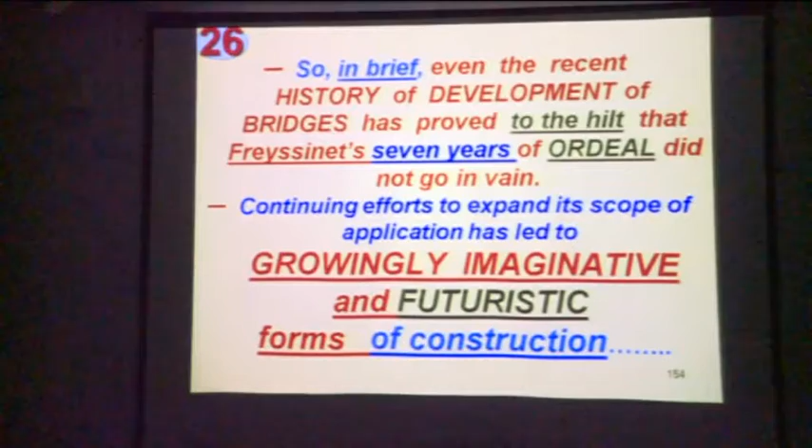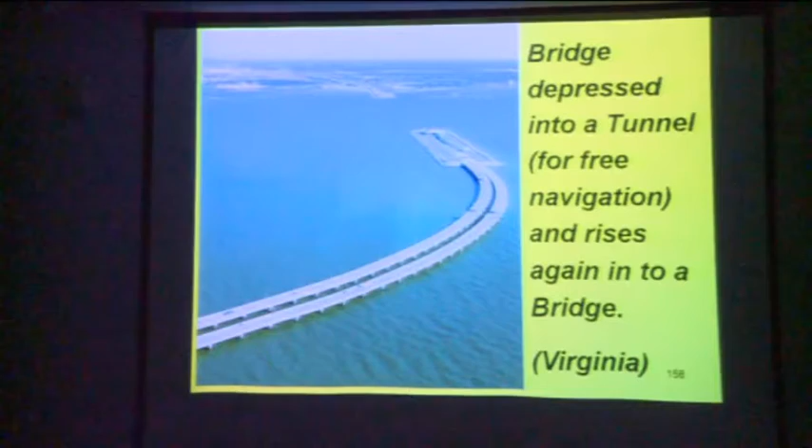This is a bridge, and where you see water between one end of the bridge and the other end, that's where the navigation span is. So they wanted to put a navigation span across, but at a great height so that ships of a certain mast height would be able to go. Environmentalists rightly intervened - they said no, we will not allow that. And after a lot of discussion, this bridge goes down, becomes a tunnel, goes up, comes up at the other end, so that the navigation is through without that top span bridge.

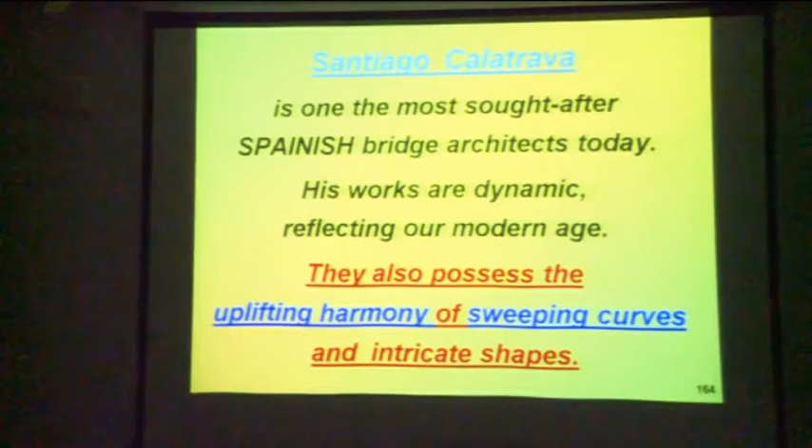Not this one. The soaring bridges of engineers - today one of the best is Santiago Calatrava, Spanish, is one of the most sought-after Spanish bridge architects today. His works are dynamic, reflecting our modern age. They also possess the uplifting harmony of sweeping curves and intricate shapes.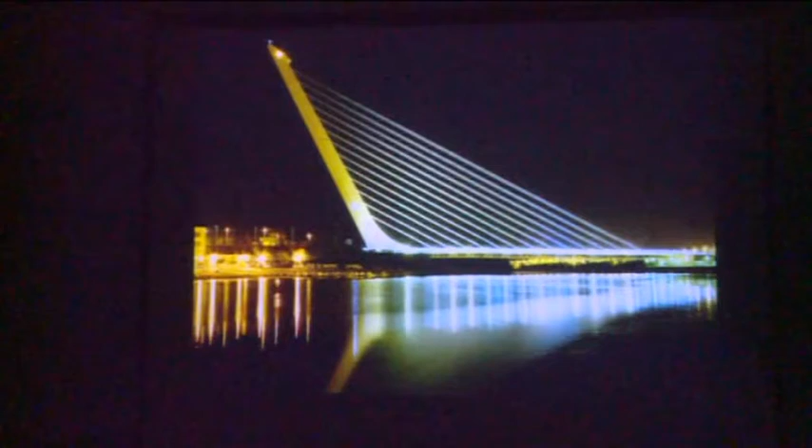His Alamillo Bridge in Seville, Spain, is the one I just showed you. Calatrava also applied his soaring spread-wing style to the footbridges of the Milwaukee Art Museum in the US.

This is the Science City in Seville, Spain. I'll show you this in greater detail, although nothing really comes close to the City of Arts and Sciences designed for Valencia, Spain - the culmination of his highly elegant style. Look at the piers, they're just toothpicks ultimately. What is this? The buildings behind had to be redesigned in order to suit his curves.

This is one of the tourist spots. People go there, they're taken by the tourist agencies and given 2 hours to just look around. This is Calatrava.

You just don't know where they start from, emanate from, where the load is going down, almost to a point. And what is the bearing pressure? You know, what is the bearing pressure under a lady's high heel? It is somewhat similar - the same as the pressure under an elephant's foot, because the diameter of that heel at the bottom is less than 6 1/4 inch. That's what happens, and he has done that.

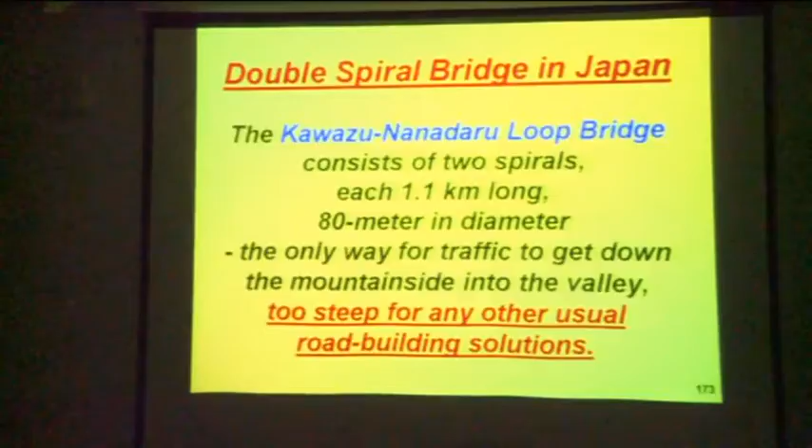The double spiral bridge in Japan, this busy route, the winding down, etc., is this one. They were told not to cut a single tree, so they had to do the grade separation from bottom or top by doing that without going through the hills and cutting the trees.

Then this was copied by the Chinese. This bridge, the Nanpu Bridge with spiral approach, a similar spiral way in Huangpu River across South Dock in Shanghai. And then this same thing at night.

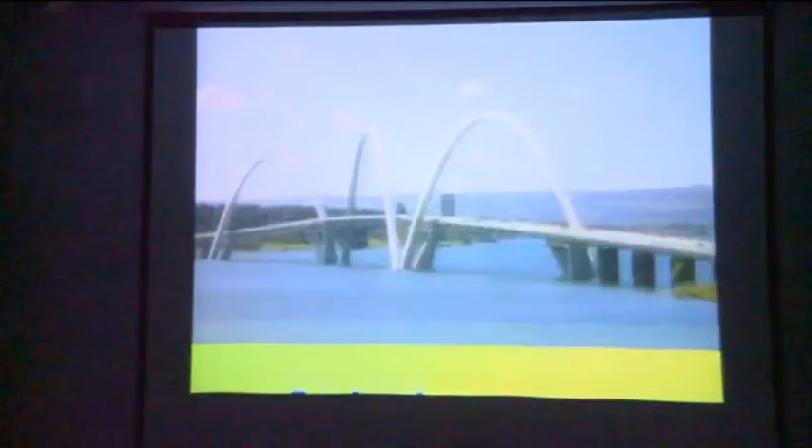Then the JK Bridge across the Paranoa Lake, Brazil. This spiral bridge - there's not much in it, but here it is.

Then some of the futuristic concepts stretch beyond the boundaries of imagination. This is the South Korean bridge. You visit the bridge, you don't use the bridge to go elsewhere. You reach the bridge by water taxis because the bridge contains everything - theaters, museums, markets, libraries, everything.

I don't have the pointer. What the heck, I wanted to throw away this damn thing.

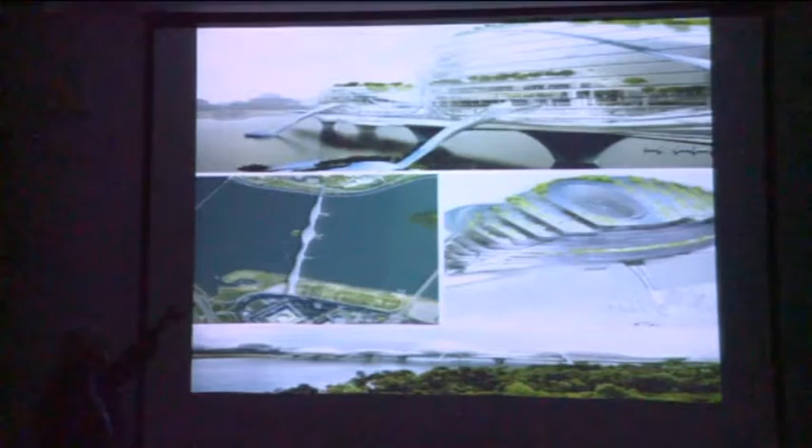This is - those are the points where the water taxis take you to, and that's the bridge, and that's one of the shots of this. It has got IT offices, museums, libraries, everything. Then here is a bridge with solar panels to generate energy.

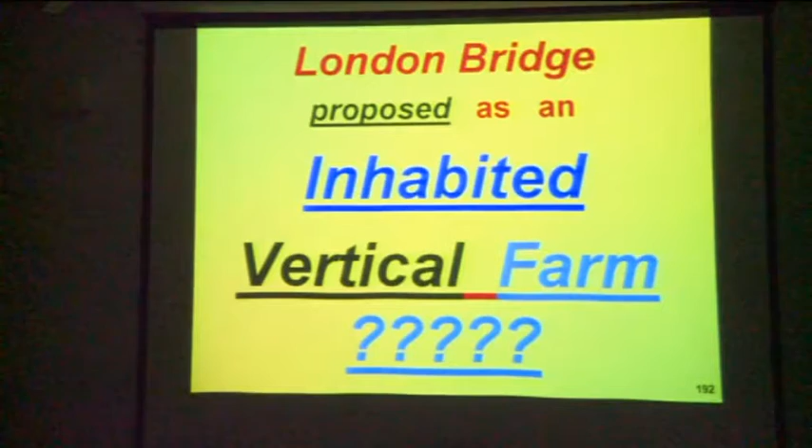London Bridge - I'll show you that, across... now this is an artist's impression, it's not been built yet, but it tells you that you can build vertical farms at bridge sites which will give you all the produce of the village to send to the market. Chetwood Architects, it was their proposal.

Then the informal bridge city for Italy. Now this is something - a long portal bridge, disused now for traffic, but good enough for the loads from the residences.

You have to - your address will be coordinates X, Y, Z. And then those afraid of heights would want to steer clear of the jazz studios, the city in a bridge concept modeled after the Ponte Vecchio in Florence, Italy. It was created for a contest that aims to identify a creative new use for a decommissioned highway between Salerno and Reggio Calabria in Italy. The proposal places a precarious new urban center onto existing infrastructure to not only provide amazing views but have an impact upon the ecology of the surrounding landmass.

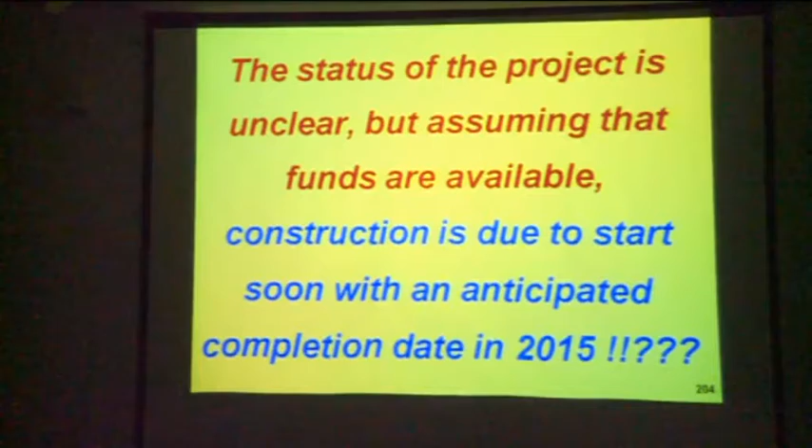Now this one, this is Spence - no, this will never be built. The status of the project is unclear. They say completion date 2015, today is 2016.

Then the Dubai thing. The architect here is Zaha Hadid. She's an Iraqi architect, settled in England, does excellent work, is world famous. She was commissioned as consultant for the Tokyo Olympics 2020, and she has given such beautiful sweeps of curves and full drawings and everything, but after 3-4 years into business, the Japanese cancelled her contract because they said it's impossible to build. That's the trouble with the architect - they just draw something, then the poor structural designer has to worry about how to, and he makes all sorts of assumptions, solving a problem that didn't exist. So this is Zaha Hadid.

And then this is Dubai. This was designed by New York firm FX Fowle. Awe-inspiring concept forever, but the Sheikh Rashid bin Said Bridge is due for completion very soon. It will have, hold your breath, 12 passenger lanes, a dual rail track for Dubai's Metro Green Line, and a man-made island with an opera house, and will carry some 20,000 vehicles per hour.

Then the solar wind concept. They say the bridge is always across a gap where there is enough wind, so why not generate the energy? That's how it is.

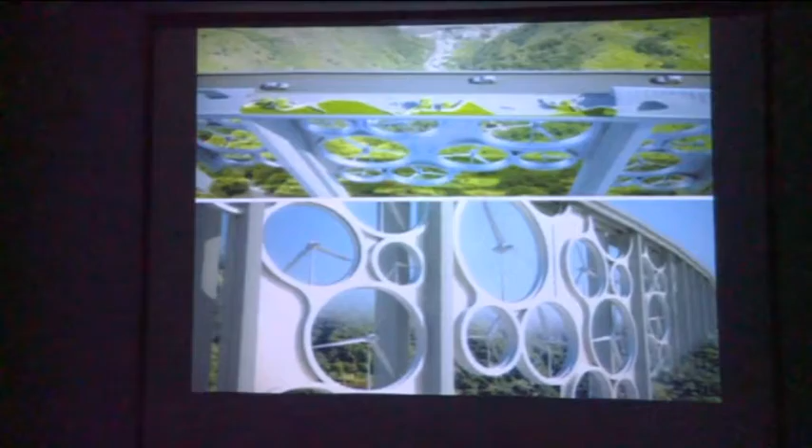Large-scale wind power may necessitate putting turbines in unexpected places, including over rivers and valleys that are often wind corridors. So even if this particular design of a wind turbine bridge, which also has a grid of solar cells embedded on the surface of the road, isn't entirely realistic, it's an interesting concept. The designers say the bridge could power as many as 115,000 homes.

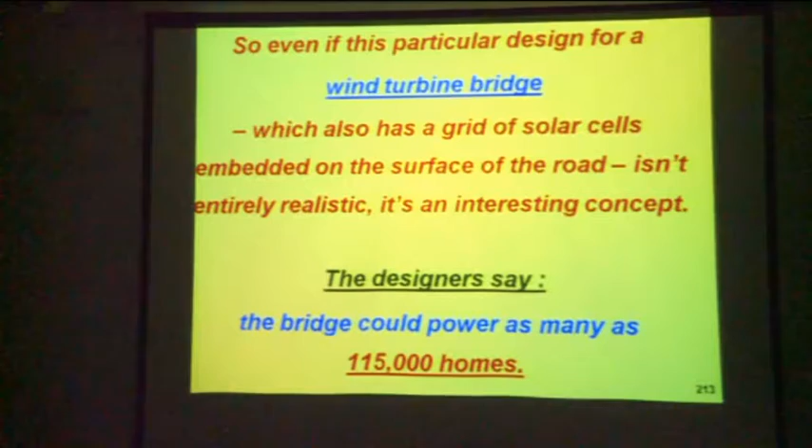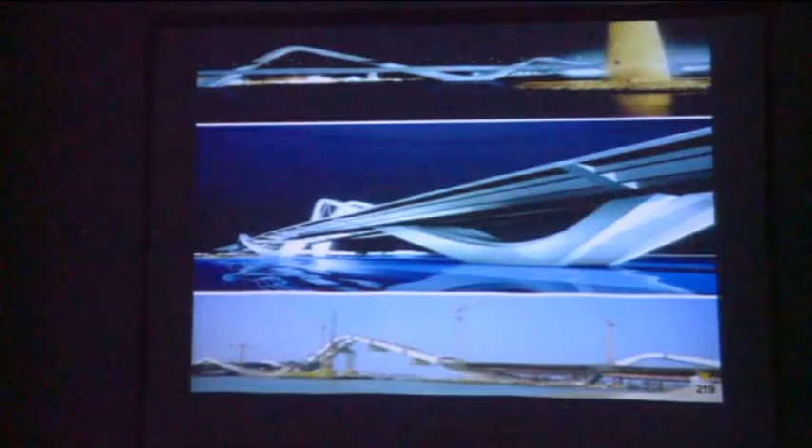Then comes Zaha Hadid, the one I was mentioning to you about. See the curves she has created — not her curves, but these are the curves she has created. Asymmetrical steel arches form a wave-like design which goes with the ambience of the sea, waves emerging from cantilever road decks on either side, in this design for Abu Dhabi's Sheikh Zayed Bridge by Zaha.

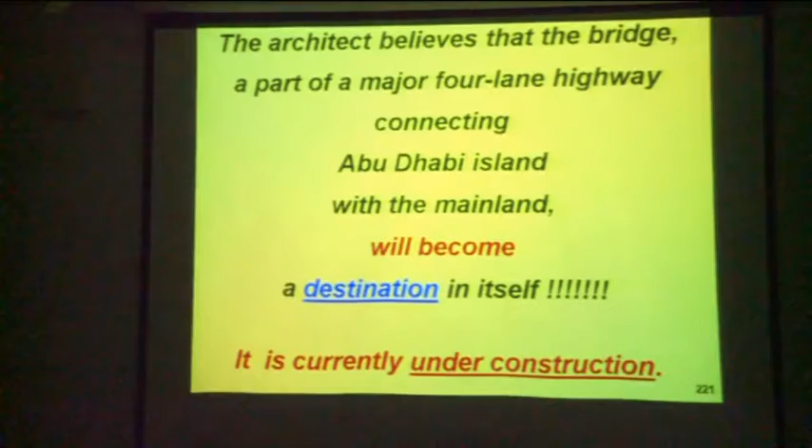Then the last three or four slides. The architect believes that the bridge is part of the major four-lane highway connecting Abu Dhabi Island with the mainland, and it will become a destination itself. It is currently under construction.

Then comes this architect Sendwal, who created an ecologically fresh multiple-use bridge for Amsterdam. It's only on paper at the moment — the very latest. The primary materials of this bridge are wood, aluminium, and steel, so you can even use the surface of the bridge for art.

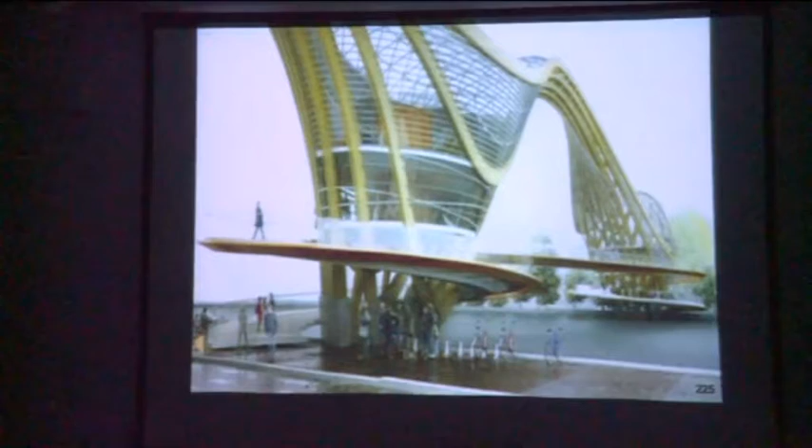Sendwal plays with different kinds of glass, which gives the bridge that futuristic ambience and also a fine view of the exterior. The structure is planned as a habitable one with narrow houses, modern buildings, a bike shop, a large mansion, and a garden. This very European bridge promotes merging of cultures and times, and here's the bridge. Another view. And the last one.

It is therefore an undeniable professional responsibility of a good bridge engineer to know the culture and the subtle turning points that temper the development of the bridge craft, and then reflect in order to carry forward such a wonderful legacy. Thank you.